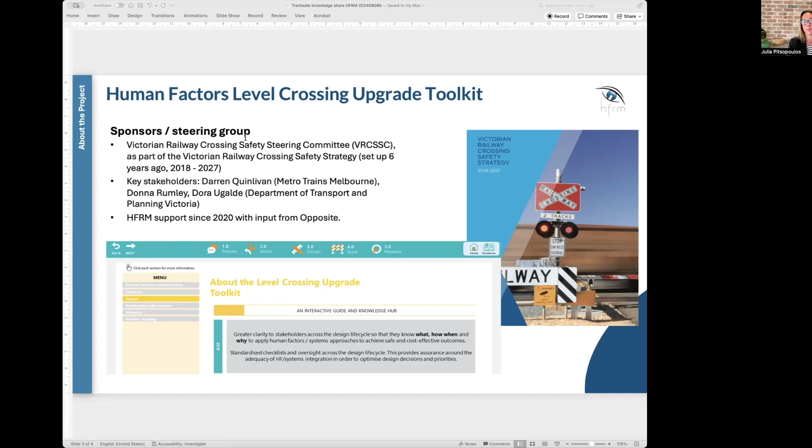So in a moment, I'm actually going to show you an overview video that takes you through the tool and its features, and then I'll give you a quick demo of the tool itself. So I'll just load up the video.

The Victorian Railway Crossing Safety Steering Committee, or VRCSSC, continue to lead the way in upgrading level crossings in order to save lives and reduce incidents. Determining which crossings to prioritise for upgrade, as well as choosing the most effective design, can be complex. We must consider the risks, the opportunities, such as major project works occurring nearby, the incidents that have occurred, and the cost versus benefits of various design solutions. To design the most effective upgrade, we must understand the users that are interacting with the crossing and the factors that influence their behaviour. Let's consider some examples.

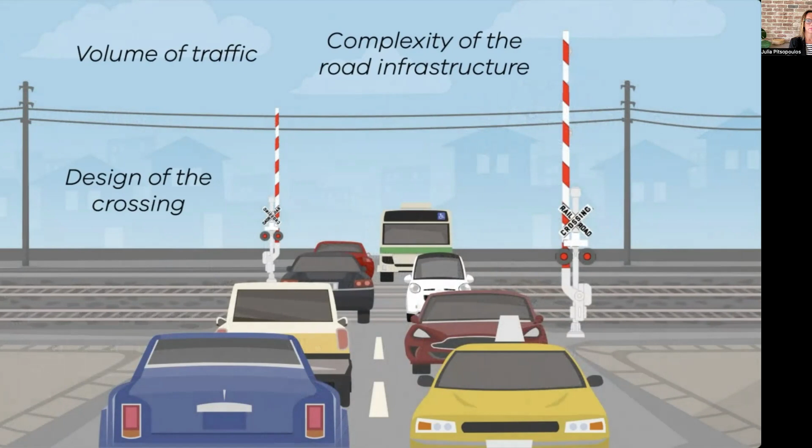In their haste to catch the train, pedestrians may bypass an emergency exit gate or take a shortcut across the tracks rather than cross at the crossing. Users are influenced by desire lines, that is, seeking the shortest possible way to their desired location. Factors such as social influence and diffusion of responsibility also play a part, such as, they're doing it, so it must be okay. Users can also be unintentionally caught in a queue across a live rail line due to a range of factors such as the design of the crossing, the volume of traffic at the location, the complexity of the road infrastructure.

By applying human factors and systems thinking, we can put ourselves in the user's shoes and understand why certain actions may make sense to them at the time. We can see how they are influenced by the design of the crossing and the infrastructure and features around them. This helps us to design a crossing upgrade that achieves the safest outcomes for those using it. There is a wealth of human factors research that can help to assess and identify the risks. However, it is challenging for those responsible for designing crossing upgrades to know where to find and how to use this information to help them to make informed decisions that optimise the crossing design.

Therefore, the VRCSSC has pioneered the development of a one-stop shop for human factors guidance when it comes to level crossings. Through wide consultation, 2 interactive human factors tools have been developed, one for pedestrian and one for roads level crossings. Through the application of these tools, a human factors risk profile can be created for a level crossing.

This helps to achieve optimal design solutions for upgrades that understand and manage human factors risks, are based on evidence from desktop and on-site reviews, and that can be integrated into the overall crossing design early enough in the life cycle to avoid costly redesign. The human factors tools are structured around the design life cycle of a crossing, from prepare to assess to design, through to the build and maintain stages.

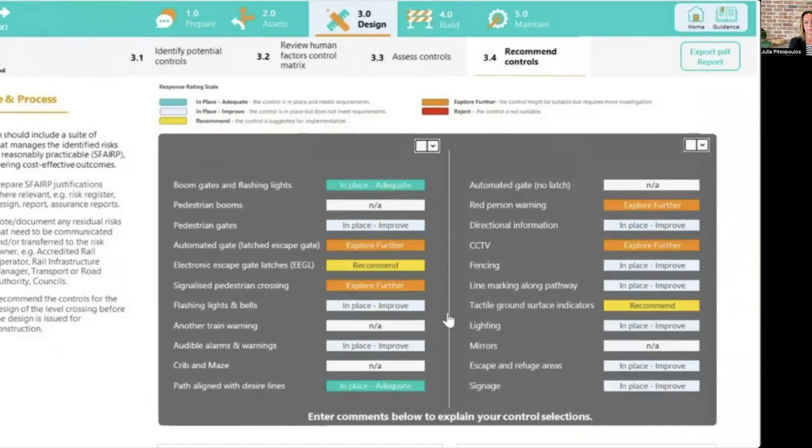Once the review is completed, an overall human factors risk profile for the crossing is automatically created on a visual dashboard. This information can be used to feed into broader risk assessments. This provides an informed foundation for making risk-based decisions in relation to the priority level of the crossing upgrade and the most appropriate combination of controls to include in the upgrade. This might involve strengthening existing controls at the location and/or introducing new controls.

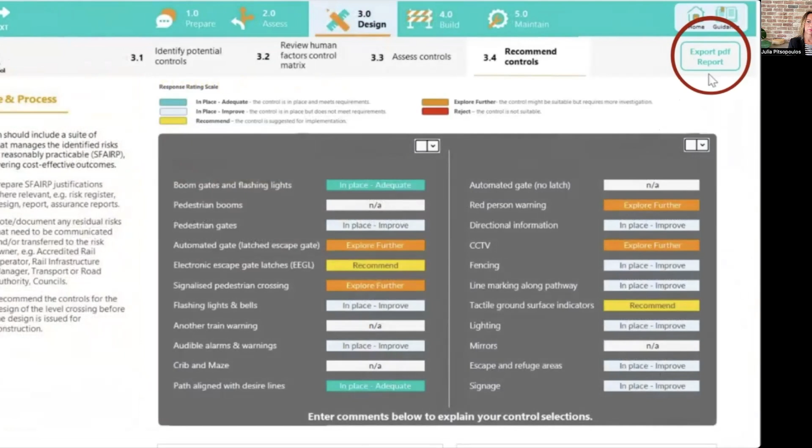The user can click on further guidance about the pros and cons of risk controls from a human factors perspective in order to support effective decision making. The information in the human factors tools can be printed and saved electronically. The human factors tools make it easier for designers, safety, and human factors professionals to effectively understand and manage human factors risks by providing an interactive one-stop shop. The tools help to optimise safety, cost benefit, and regulatory compliance.

They should be used when prioritising which level crossings to upgrade and when making decisions about the optimal design solution for the upgrade. The human factors tools are a great advancement in the rail industry as they make it easier to accurately integrate human factors and systems thinking in order to optimise the safety outcomes of the level crossing upgrade program.

So as you can see through the video, it gives you a bit of a what, who, where, why tour across the video. You know, why have we developed it? Who's using it in the industry? Who can benefit from using the tool, as well as how the tool actually works. So we've got a couple more minutes. So I might just put the tool up on the screen and you can just have a little bit of a look at the tool itself.

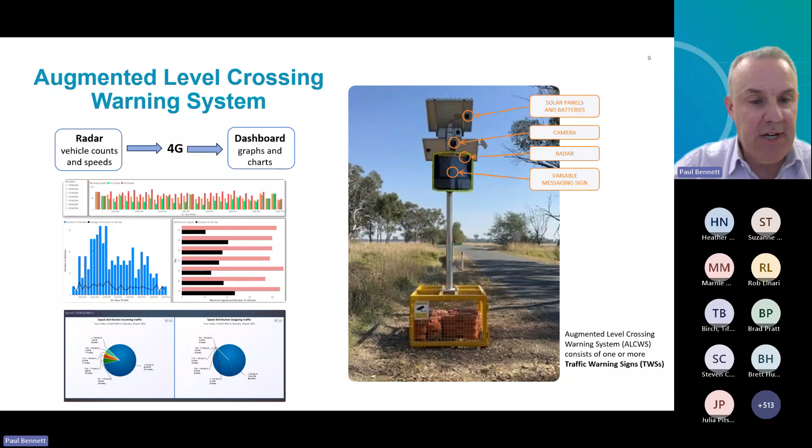And we've also got the solar panels there and the battery you can see to keep it powered. There's a modem as well, so the vehicle counts and speeds from the radar, we can receive those to an online dashboard over 4G. And just some examples of some of the bar charts and pie charts that you can see on the dashboard.

This is the trial site on Odewahns Road. You can see it's also got a short stacking issue, the distance between its T intersection with Olympic Highway, and there's only 27 metres between the crossing itself and the highway. We weren't actually looking at that issue, but the yellow square there you can see is the location where we put the traffic warning sign, and the crosses mark all the cameras that we use to observe traffic.

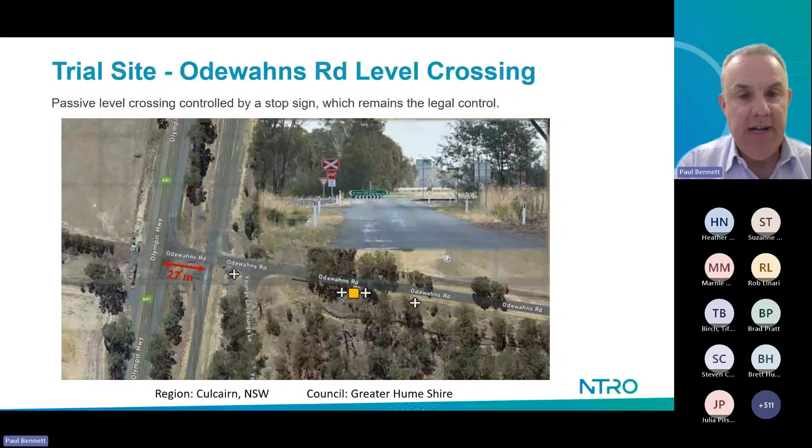It's important to remember that during the trial and in any case the stop sign remains the legal control, so it's just augmenting that. So part of the reason we chose this site was ARTC had actually previously done a study at this site before we had any augmented warning system in place.

And they use what's called the Road User Behaviour Data Collection Module, which uses CCTV and AI modelling to detect violations of vehicles not stopping at the level crossing. And they actually found that at least 53% of drivers were not stopping at this passive level crossing. So that means no more than 47% were compliant. So a bit of a concern there. I should mention that they partnered with a company called Acusensus for their technology there.

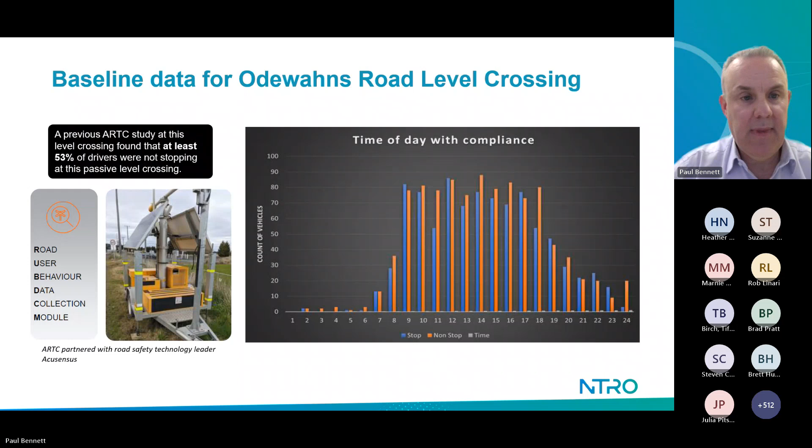Between 50 and 65, stop ahead. 30 to 50, LX ahead. Most people know that LX means level crossing. And less than 30, stop for TOM, and TOM means traffic operations monitor, which is another name that we gave to this traffic warning sign. And we'll be looking at different messaging in upcoming trials.

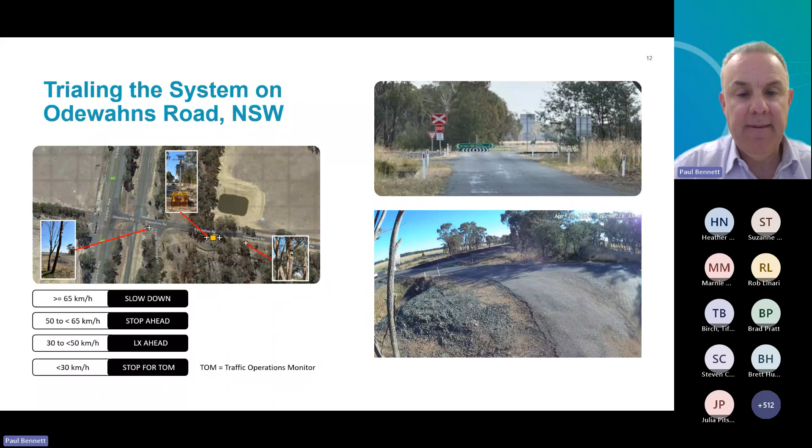So the control site was another site, an active level crossing in New South Wales. This one is in Glenquarry, which is within the Wingecarribee Shire Council. So this one has the active advance warning signs 185 metres in advance of the crossing. You can see the one on the left has the flashing wigwags that activate when a train is detected. So installation requires trenching all the way to the railway line.

There's some conjecture that when motorists see the lights come on, for some it's a signal to speed up and try and beat the train. So that can be a bit of a concern with these flashing wigwags. And you can see in the image on the right, you've got the RX5 flashing lights to the side and overhead at the crossing itself.

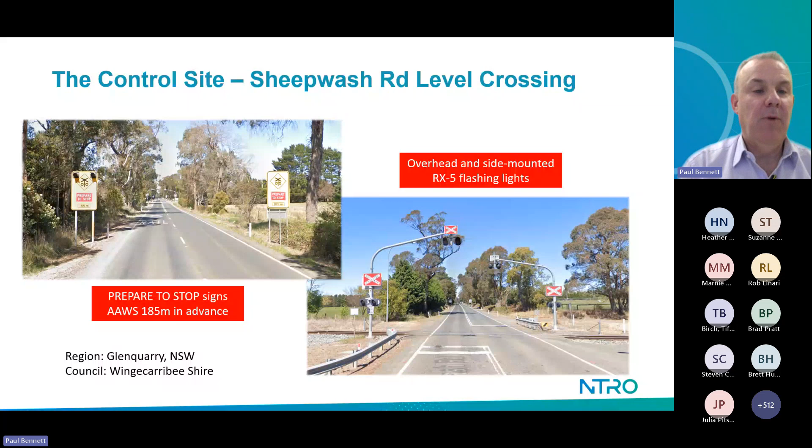So One Wi-Fi was the company that helped us at this site. They set up their camera. So it's very similar, self-powered with solar panels, a camera on the front and a modem. You can see the image on the right there is what they were capturing, and they had a detection zone. So it was a movement sensor video camera to capture typical driver behaviour on approach to the level crossing that's controlled by flashing lights. We're particularly interested in the vehicles that are approaching as the flashing lights come on and when they're on.

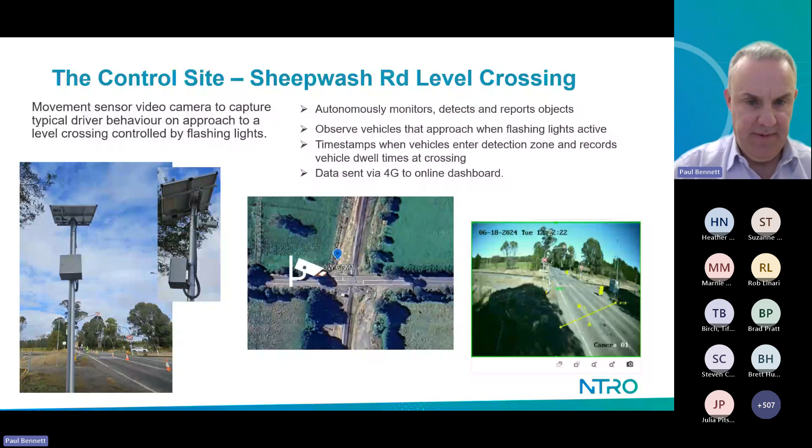So it autonomously monitors, detects and reports objects, observing vehicles that are approaching when the flashing lights are active, and it was sending timestamps of each vehicle entering the detection zone and recording those that stopped, and how many seconds they stopped. So similar to the Odewahns Road site, that data was sent to us to an online dashboard over 4G.

Initial observations: we've actually just received all the equipment today, having had it all collected from the contractors from Odewahns Road yesterday. So the field trial has only just finished, and the next stage is the AI analysis of all the vision. But our initial observations, just from looking at individual clips of vehicles approaching, is that more and more vehicles are actually stopping at the level crossing. These security cameras are activated when they sense a vehicle, so each clip is a vehicle approaching.

So next steps: as I mentioned, the field trial finished yesterday at Odewahns Road, and we'll conduct the AI analysis on the vision recorded by the security cameras, and that'll give us actual measurable improvement in compliance. There are plans to conduct two more trials, one in Australia and one in New Zealand. But for these sites, unlike Odewahns Road, which is a straight flat road where you can see the level crossing in advance for quite some distance, we're looking for sites where there's a bend in the road or vegetation or, for whatever reason, the sight distance to the actual level crossing is quite short.

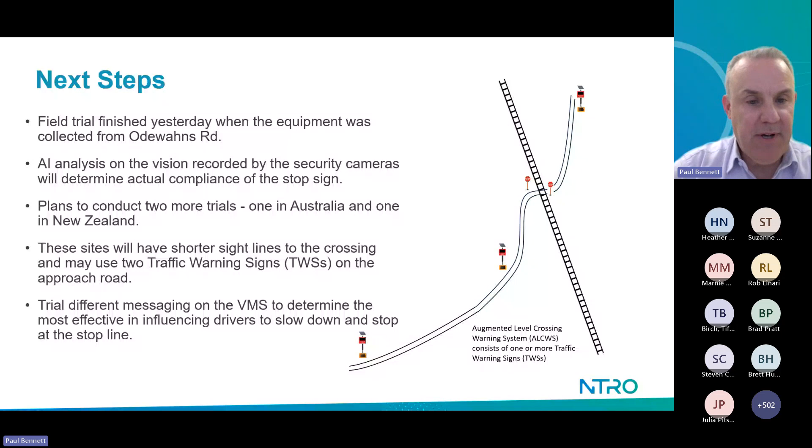So in those trials, we expect that drivers will actually see the traffic warning signs, the VMS, before they actually sight the level crossing. And we'll trial different messaging in that case as well, with a human factors assessment determining what messages are most effective. But again, we'll have different messaging depending on the speeds of the approaching vehicles, different messaging for those that are speeding as opposed to those going at a reasonable speed.

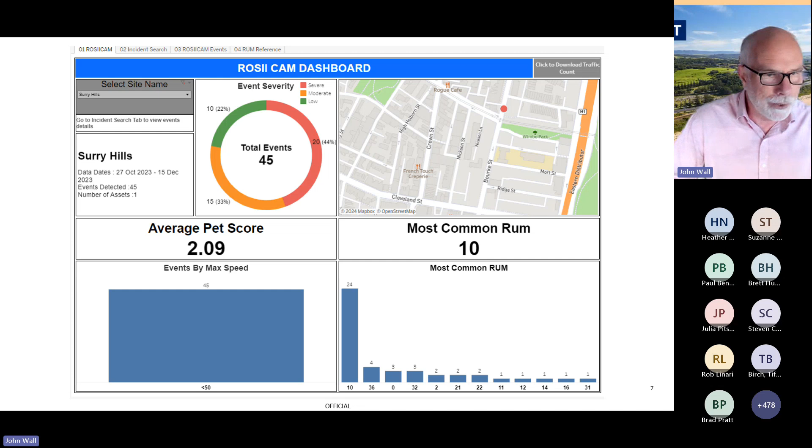Importantly, we not only capture vision of what's actually happening at that site, but we use the AI to process that vision to give us data that we can then go off and analyse as well. And this is a snapshot of some of those events that we actually captured at this particular place. I'm going to show you one here. This is one with an adult as a pedestrian. It was classified as a severe event. It's got a code there. My column's a little bit out, but this here is our time to collision of about 1.2 seconds.

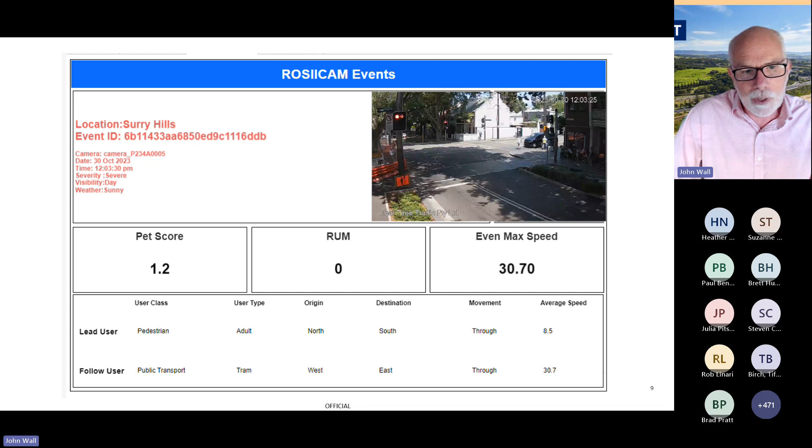So let's have a look at this. So the time to collision, or what we call the post-encroachment time, is when both vehicles are in the same spot at the same particular time. And you can see this is a pedestrian and a public transport. The type is a tram or light rail vehicle, as we call them in New South Wales. The user type, the pedestrian, was an adult. We can classify whether it was a child as well. Let's have a look at the event.

So it may be a bit stilted being online and being on Teams, but there was only 1.2 seconds between that pedestrian and that light rail vehicle being in the same place at the same time. So we classified that as quite a severe near-miss event.

We've also been working in connected vehicles for a long time now, for just over a decade, and we've been looking at a specific technology called dedicated short-range communications. This is a system that is attached to an existing active level crossing. This particular one is a boom gate configuration. We have a solar powered system attached to that. And what we do is we're able to take a signal off the sensor, the points that are used to detect the train approaching the crossing.

And that goes through a special radio system, a DSRC system, that then pushes out an alert to vehicles as they approach that crossing. So it picks up the train is coming, pushes out an alert to say that the crossing is actually closed. And then that's picked up by a special radio within the vehicle and displays a message on a dedicated display. This is quite different because it's a hybrid solution as well.

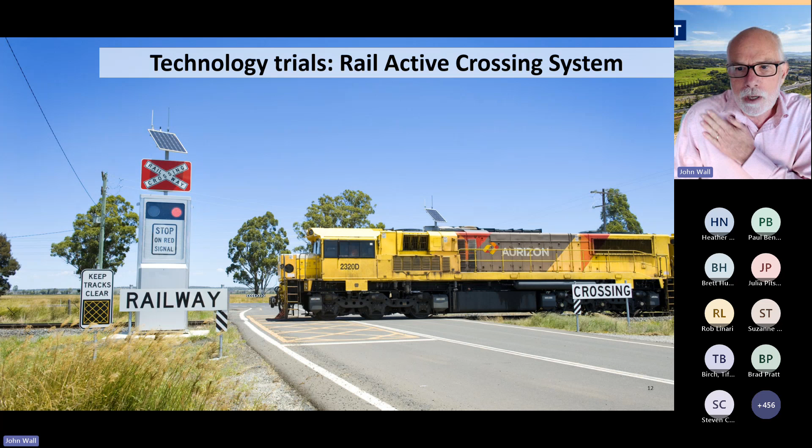There's also a number of trials that my team are not involved in, including our rail active crossing system. This is a $1.2 million trial of new digital technology to improve level crossing safety in rural and regional New South Wales. The technology, which we're calling RACS, the Rail Active Crossing System, is modular, low cost and wireless, and it's designed to turn passive crossings into active crossings as well. It uses both flashing lights at the crossing as well as wireless train-activated advanced signage. If the system does go down, in that rare case, the system automatically enters a stop sign mode and it becomes like a normal passive crossing as well.

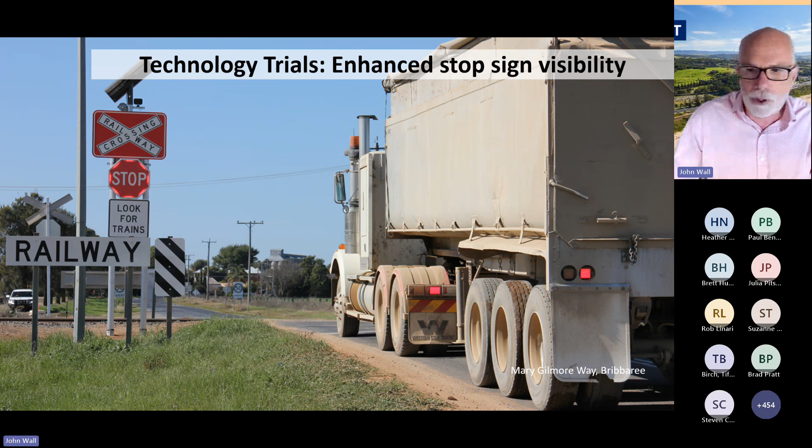We also have trials underway, again by a different team in transport, to enhance stop sign visibility at passive rail level crossings. There's a couple of treatments: an advanced warning sign, a vehicle activated warning sign, and an enhanced stop sign at the crossing itself. So 3 different treatments. Look, we've got some very positive results coming out of that. It's only early days, but there's been some positives with increases in stop sign compliance and decreased approach speeds, but it'll be some time before we have enough evidence to determine the effectiveness of these particular treatments.

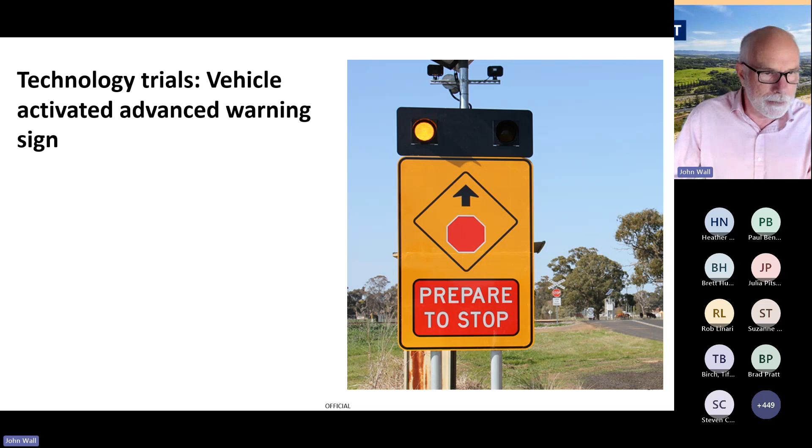And then, of course, we've got our standard level crossing improvement program that Transport for New South Wales is running as well. And that's providing, through our level crossing improvement program, accelerated upgrades to level crossings assessed as a priority for safety enhancements. And we also use it to fund road safety education campaigns and enforcement initiatives as well.

In the financial years up to 2031-2032, we've got around $7.3 million locked in for funding for each financial year right up to the 2031-2032 program itself.

From 2011, so this program's been going a long time, we've funded 71 major level crossing upgrades in New South Wales: 29 active to active upgrades, that's installing boom gates at sites which already have flashing lights, and 42 crossings have been converted from passive to active as well.